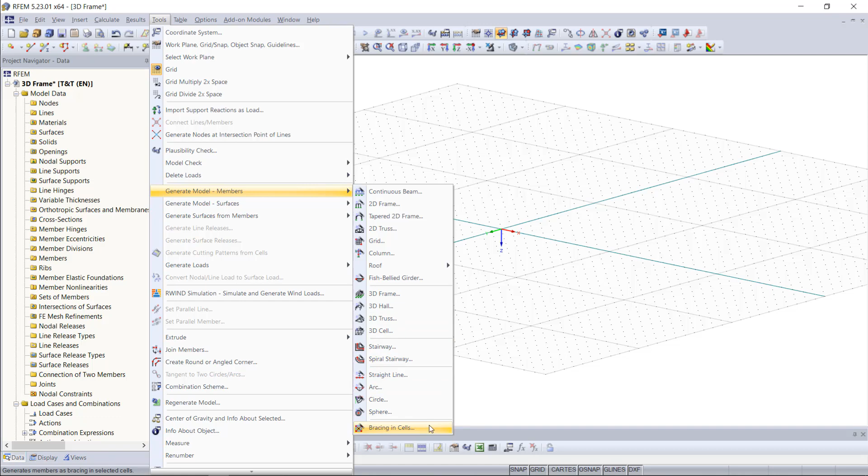As an example, we are going to create a 3D frame with bracings only using the model generator. Once again, go up to the menu Tools and choose Generate Model Members, 3D Frame. Then, as you can see, a new dialog box appears.

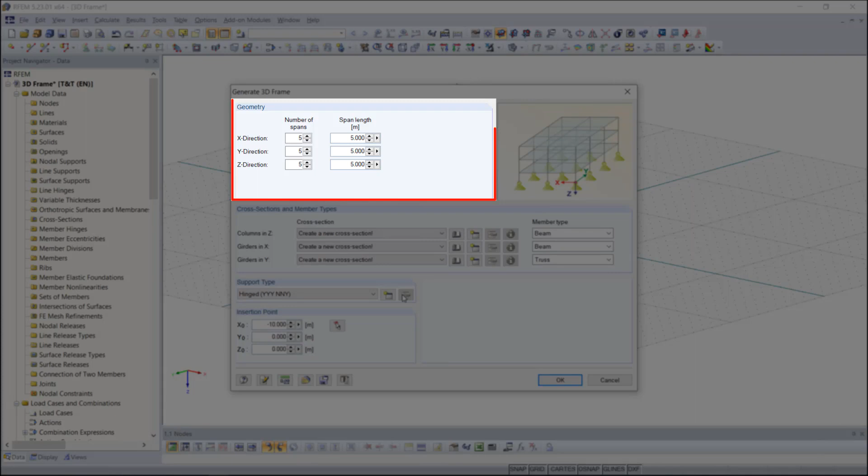Here we have to enter all parameters, like the geometric information for our frame, cross-section and member type, support type, and we can also choose the coordinates where our structure should be inserted.

We are starting with the geometry. The number of spans we can set as 3 in X direction, 2 in Y direction, and 1 in Z direction. For our span lengths, we choose 5 in X direction, 4 in Y direction, and maybe 3 for the Z direction.

Moving on to the cross-section and member types, the program tells us here that we need to create a new cross-section. We will start with the columns, so for this, open up the cross-section library. You can see here that we have many different cross-section types. For the columns, we will begin with the rolled sections, and in particular the IPE 300.

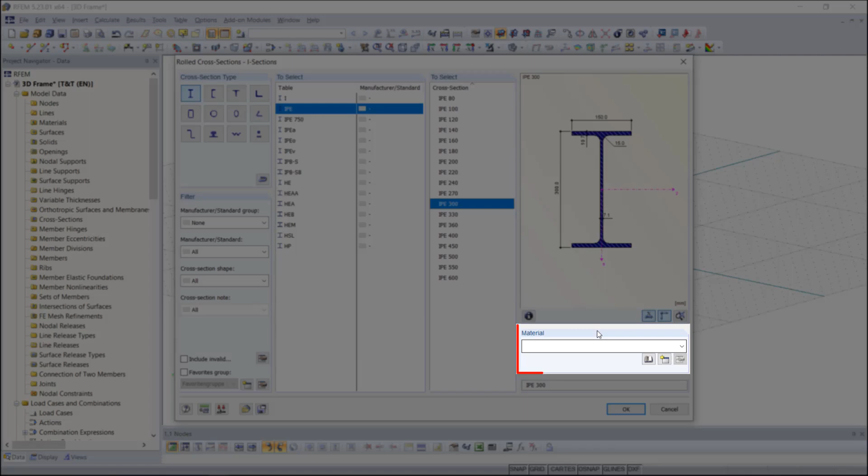Regarding material, we can import it from the material library, and we will choose steel, for instance S235 based on the European standard. Then we click OK, and we click OK once again.

Now, as you can see, the same cross sections are set for all of the members, but for the other members I actually want different cross section types. So for this, if you already know which kind of cross section you want, it's quicker to click on the Create a New Cross Section symbol and simply enter the name of the cross section. As you can see, RFEM automatically imports the properties out of the library. We enter OK to finish our selection.

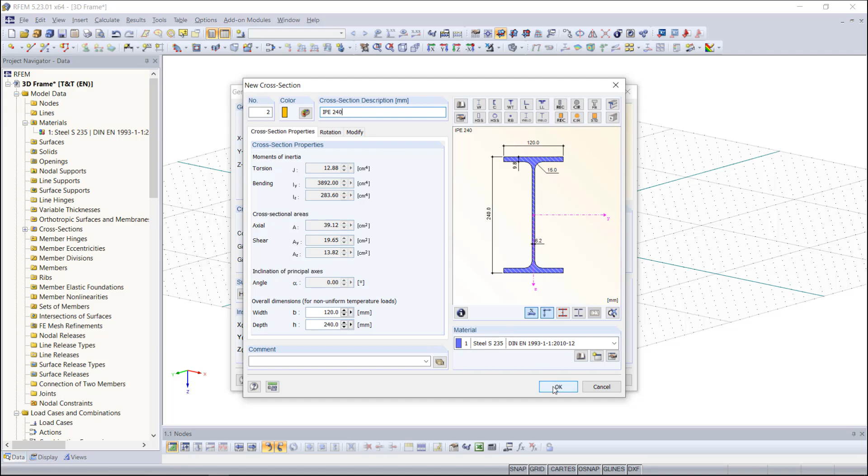Same procedure once again for the members in Y direction: enter the name of the cross section and click OK.

Under member type, we have several options using the drop-down menu, like the basic beam members, but for our frame also a truss member, which the program automatically inputs here. A truss is going to set a moment release, so we are only transferring axial and shear forces.

As the next step, we can also change our support types for the structure using the drop-down menu or by creating a new support type. But for our frame, we just leave the hinge supports. In addition, we can specify where the structure should be inserted, and we choose maybe this point. By entering OK, our frame is simply generated.

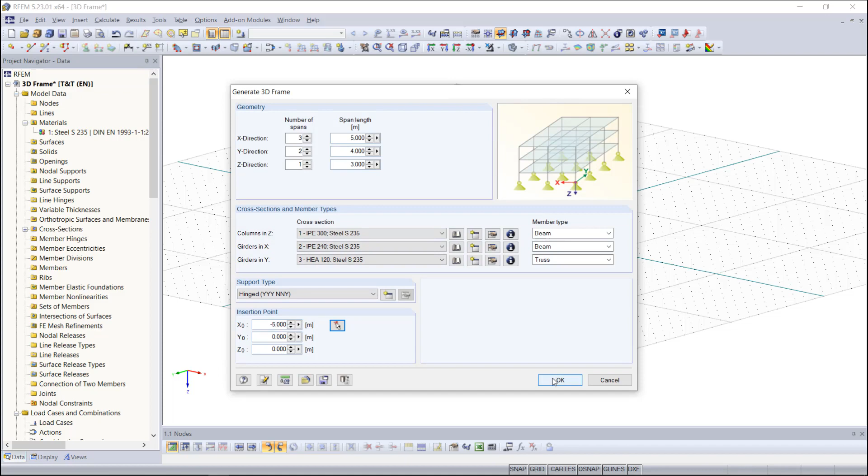So, as I've already mentioned, we can also create bracings. Once again, go up to the menu Tools and then choose Generate Model Members. Down here we can find Bracing in Cells.

Then a new dialog box opens, and as member type we choose tension, as it's set by default. Then we select the cross-section type and enter OK.

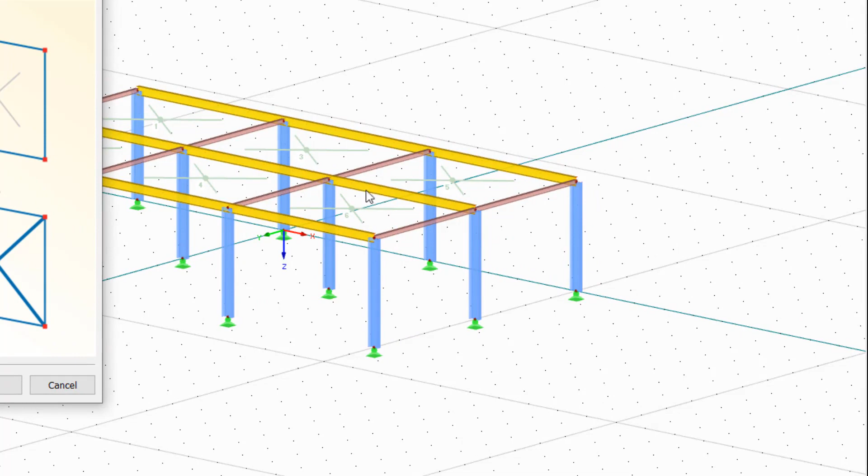As a next step, we can choose those cells where we want to add a bracing. As you can see, RFEM automatically recognizes closed ones. But for not completely closed ones like this one, we have to create first a virtual line in order to use it as a bracing cell.

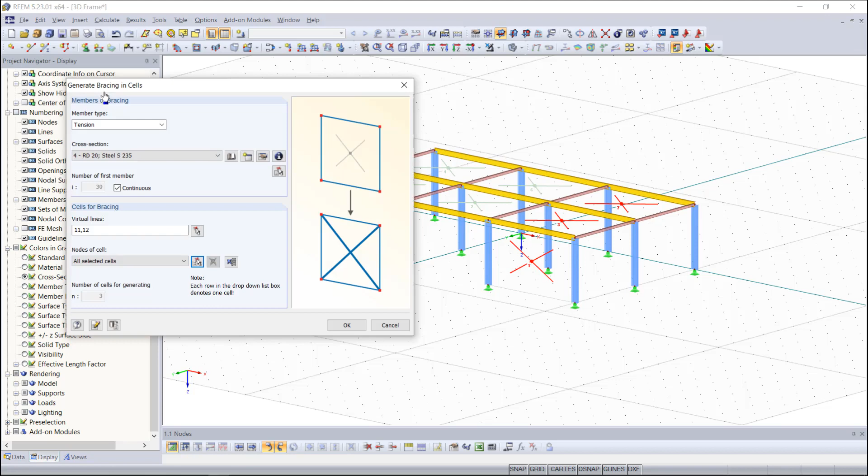Once done, we click OK, and then we choose the cells, for example this ones. Then by entering OK, our bracing in the chosen cells is quickly created.